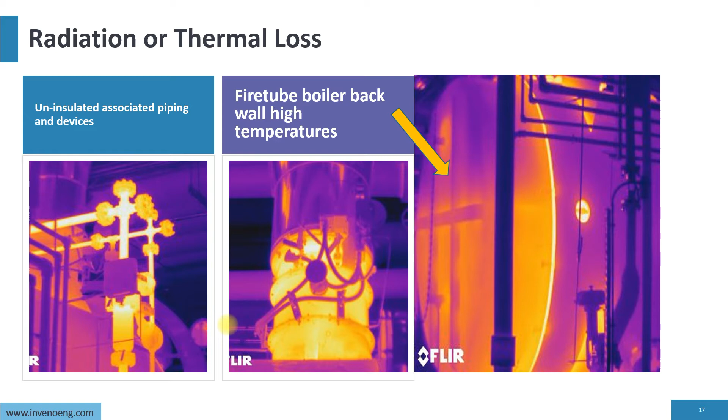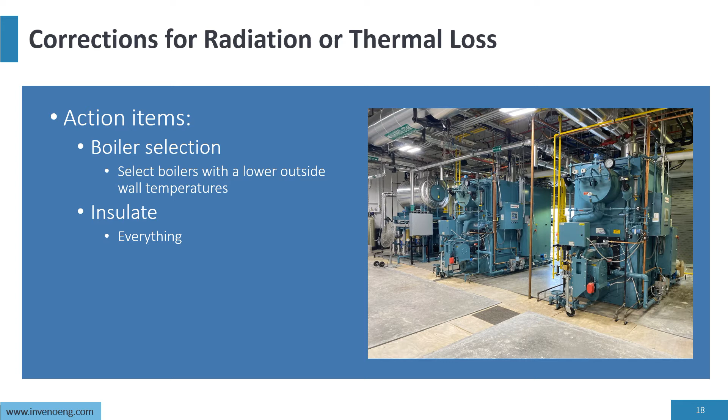Blowdown. The thing with blowdown, the surface and bottom blowdown, losses can range from 0.5% to 12%. Action item, proactive program in recovering all condensate. More condensate you have coming back, less blowdown you're going to have. Condensate's pure. It's the purest water you're going to have for the boiler, purer than RO. So higher condensate recovery means lower blowdown. So if you are blowing down, make sure you're doing blowdown heat recovery.

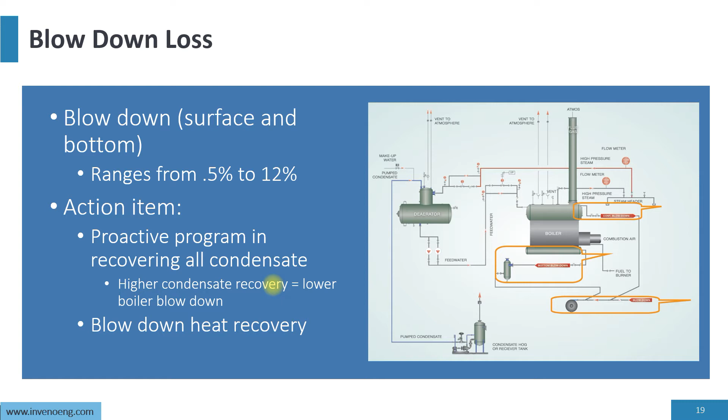Deaerator operation, non-condensable vent, feed water temperature. Non-condensable vent, dissolved oxygen testing, 7 parts per billion. You need to be doing testing every 3 months, or most people are going to online testing. You need to do the test per ASME standards. So, reduce steam venting depending on the dissolved oxygen test. So, if I'm down at 1 part per billion, then I'll reduce the vent to atmosphere.

The deaerator manufacturer in their specification will have the quantity of venting that's required. Typically it's 100 to 250 pounds per hour, very small, to get the non-condensable gases to come out of the deaerator. Pressurized condensate directly back into the deaerator. Don't stop at a condensate tank vented to atmosphere. So if we have a high pressure deaerator, we can take that directly back into the deaerator without deaeration.

End user for flash steam recovery. Take the flash steam that's coming back into the system and utilize it for the deaerator operation on, let's say, a pressurized return system. So you increase the steam thermal cycle efficiency. The real thing we want to be looking at is steam system thermal cycle efficiency, and that's not boiler efficiency.

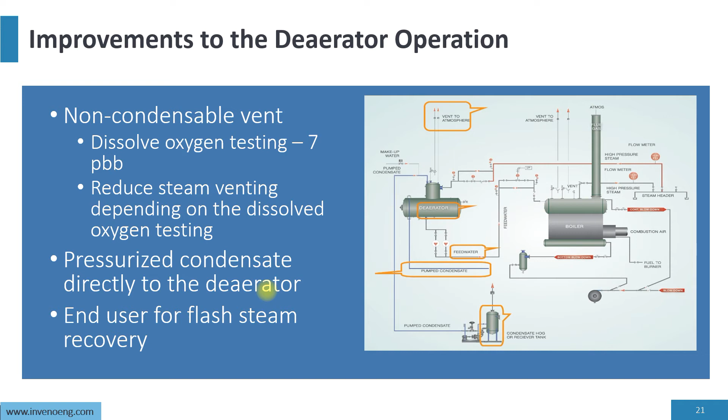1 pound of condensate loss equals 1 pound of makeup. So if I am out there discharging condensate to the drain, 1 pound of condensate means I'm going to make up 1 pound of makeup water. Now that can increase my blowdown. Besides, it increases my chemical costs. It contributes to energy losses. So makeup water entrained minerals will have to be removed from the boiler operation through blowdown.

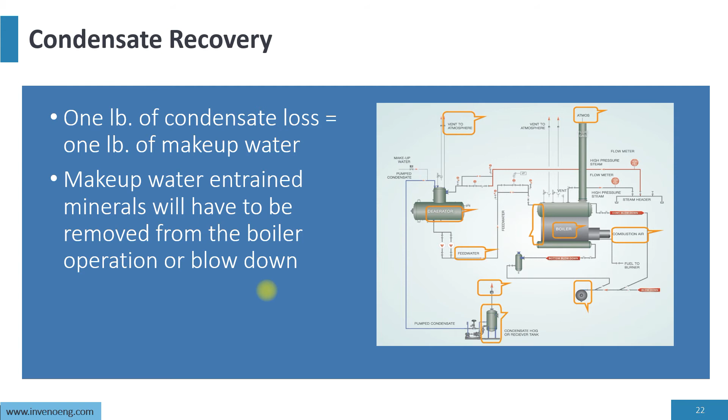So the last thing I want to be doing is adding makeup. That's why we need to bring condensate back to the boiler plant. And we don't want to be venting steam to atmosphere. Steam venting is the number two energy loss. It's a loss of condensate besides loss of energy. 1 pound of steam being vented is 1 pound of water. Today, there's no reason for steam venting in today's industrial plant operation. There's not. You should never be venting steam.

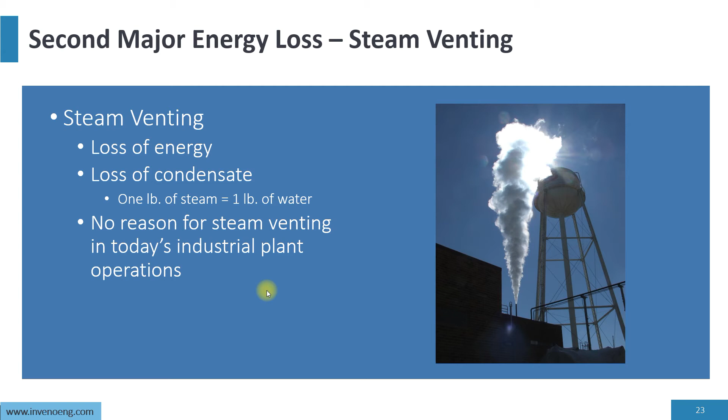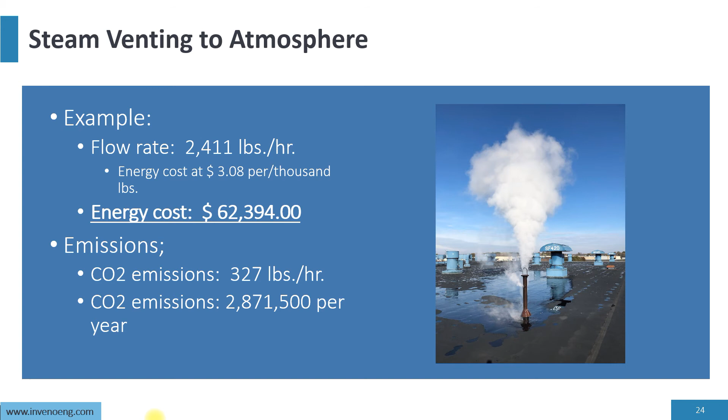So, example, flow rate of 2,411 pounds per hour, energy cost of $3.08 per 1,000. This vent here is costing you $62,394 a year. Sizable. CO2 emissions, 327 pounds per hour. CO2 emissions per year, 2,871,500 pounds per year, which is extremely sizable. So today, no more venting. Stop venting steam to atmosphere.

Action items to prevent steam venting. Pressurized condensate return systems are awesome. Cascade systems are tremendous. And you can also implement thermal compressor systems or even implement vent condensers. Anything but vent steam to atmosphere.

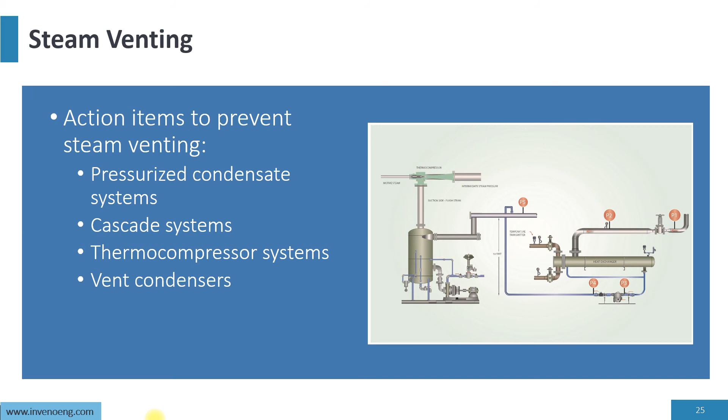What happens on Monday? We're going to come to the plant. We're going to look at all vents to atmosphere and set a roadmap for correcting the venting so that in a year and a half, there's no more steam vents to atmosphere. We're going to run dissolved oxygen testing on the deaerator every 3 months and adjust the vent for the non-condensable gases to make sure we're optimally venting and we're not excessively venting steam. So there's a number of action items that we can do, and it begins on Monday.